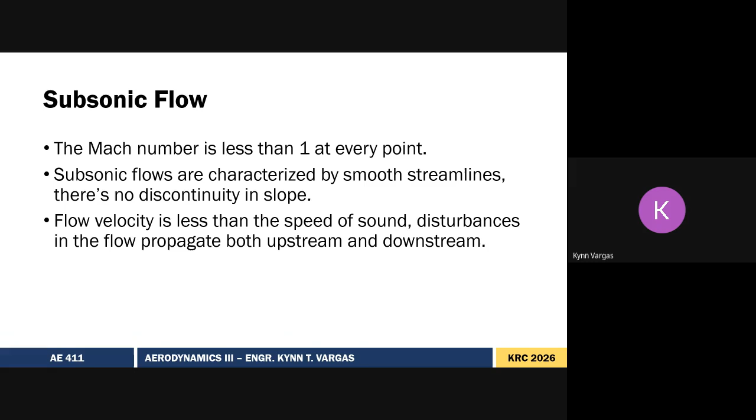We neglect that loss. Now, if the flow velocity increases above the free-stream value, and if M is close enough to 1, the local Mach number may become supersonic in certain regions of the flow. That's why Mach must be less than 0.8 for subsonic flow over slender bodies, and for blunt bodies it must be even lower to ensure totally subsonic flow. So remember these two statements: what we want to happen in subsonic flow is that all points remain subsonic. But if you have a free-stream value close to 1, what can happen on your airfoil...

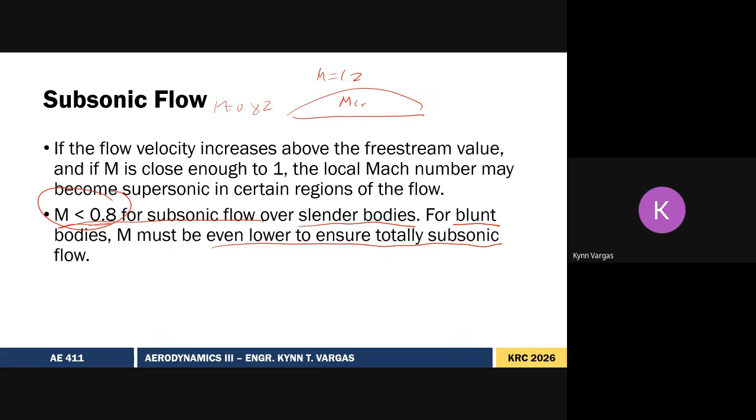For example, if the free-stream Mach is approximately 0.82, at some point on the airfoil there's a possibility of having M equal 1.2. Why? This is our concept of pressure and velocity, which we've explained repeatedly before, during prelims. This is the critical Mach number concept. So we avoid this—we must ensure that the body is totally subsonic by making sure that M is less than 0.8, or even lower than 0.8 for blunt bodies. So the free stream for a totally subsonic flow must be less than 0.8.

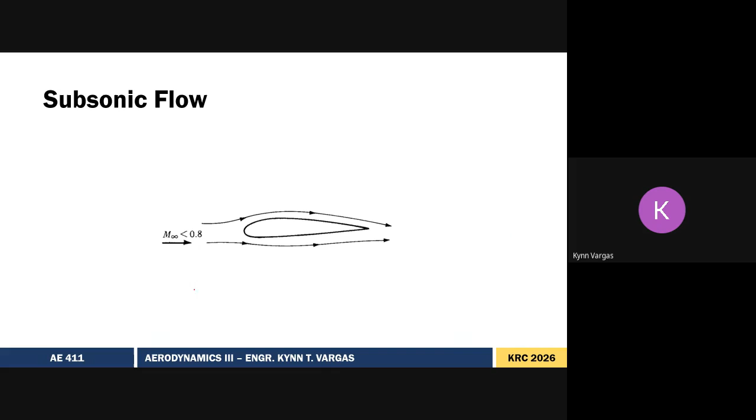Now, what are we referring to when pockets of supersonic region form? It is the transonic flow. It has pockets of supersonic flow over both surfaces of the airfoil. This is terminated by a weak shock wave behind, which becomes subsonic again. So there's a pocket of supersonic flow. Here's how it happens.

This symbol, and this is the surface—this represents a normal shock wave. Here you have a pocket of supersonic flow, and when it gets to the back here, it becomes subsonic again.

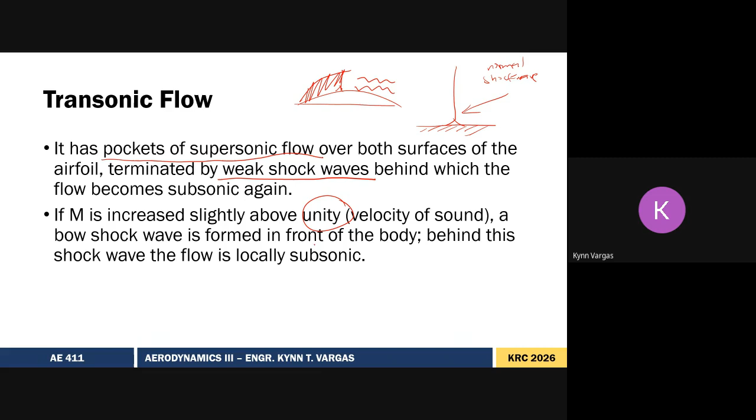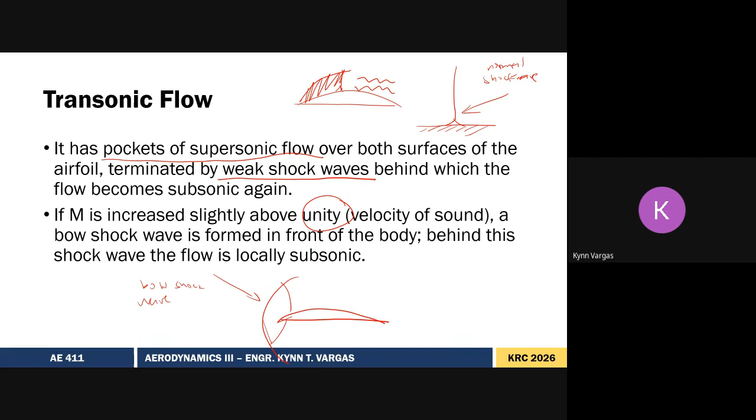Now, behind it, the flow is locally subsonic—this area is subsonic. This subsonic flow then expands to a low supersonic value over the airfoil, so while this part is subsonic, this other part is slightly greater than 1. When that happens, weak shock waves are usually generated at the trailing edge.

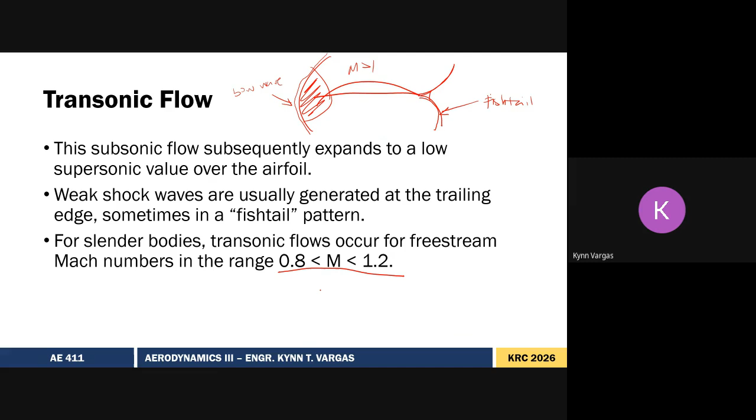So for the flow to be transonic, this is the range we give: it must be greater than 0.8 but less than 1.2. Now here's the visualization. As mentioned before, this is the normal shock wave—this kind of drawing is the normal shock wave. This is the pocket of supersonic region, only slightly supersonic, and when it reaches the back, it becomes subsonic again.

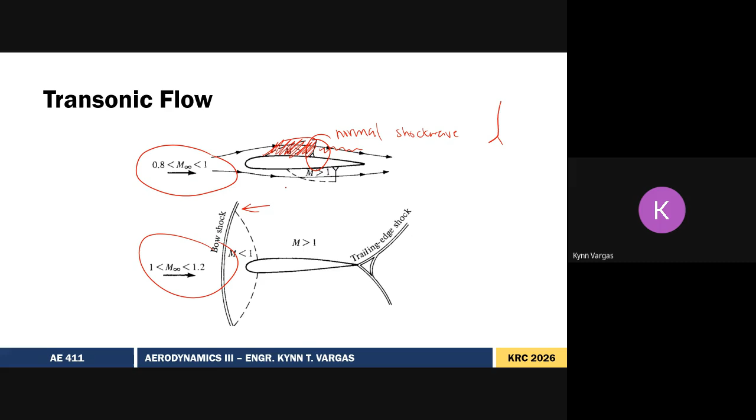This is for Mach less than 1 but greater than 0.8. Now increasing the value up to less than 1.2, a bow shock forms, represented by two lines. Upon reaching this point, it increases again slightly supersonic. The area behind it is subsonic. At the end, you have a trailing edge shock, which is our fishtail.

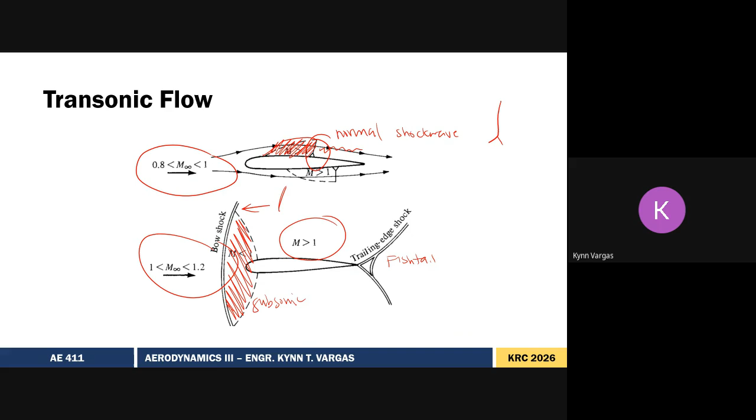So we'll start at slightly higher than Mach 0.8. You get a normal shockwave, and you have supersonic flow. What happens as you increase is the CP goes rearward as velocity or Mach increases. That's true, the CP moves to the back.

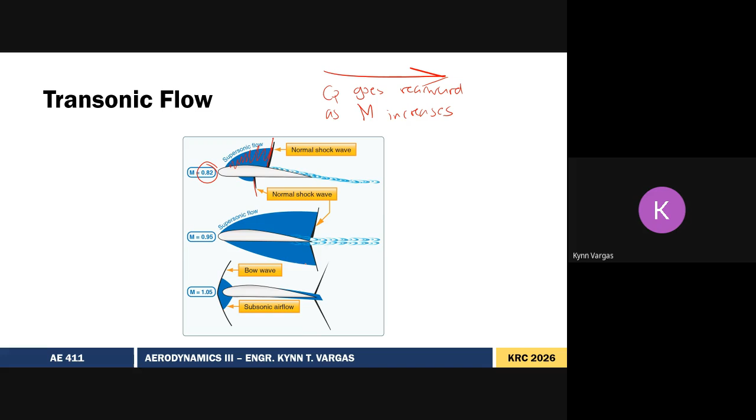Now it goes to the back, but if you exceed Mach 1, which is unity since all sound unites, what happens is you get pockets of subsonic flow here. You'll get a fishtail, and the one in front is your bow wave. So that's what happens.

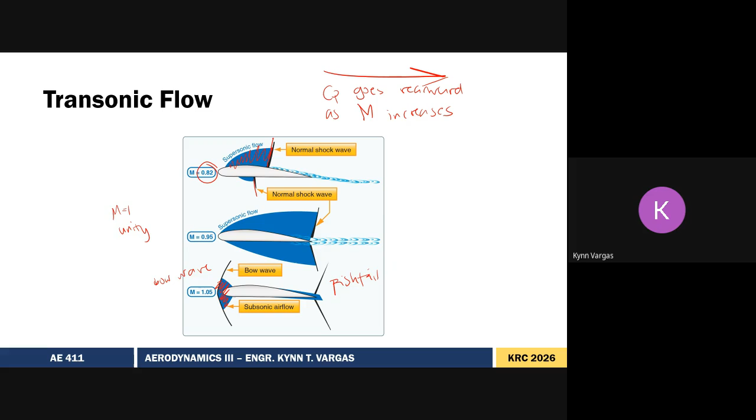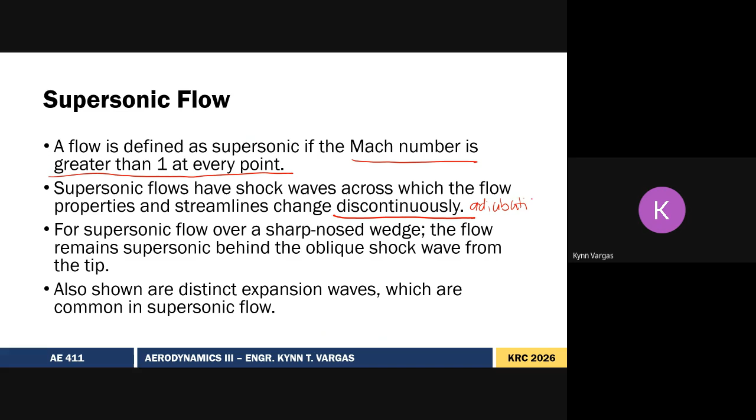Followed by that is the supersonic flow. Upon reaching supersonic flow, Mach number is greater than 1 at every point. No pockets, no transition - everything in supersonic flow must be supersonic. So supersonic flows have shock waves across which flow properties and streamlines change discontinuously. What do we mean by that? Simply adiabatic.

Not isentropic, because discontinuously means not reversible. Once chemical reactions occur, there's nothing you can do - you cannot go back to how it was before. So now, what do we use for supersonic flow?

You already know this by now - a sharp wedge is what we use, particularly a diamond airfoil. It looks like this. Now what happens? When a sharp-nosed wedge is used, the flow remains supersonic behind the shock. So the shock wave is represented by two lines. Now also shown are distinct expansion waves here.

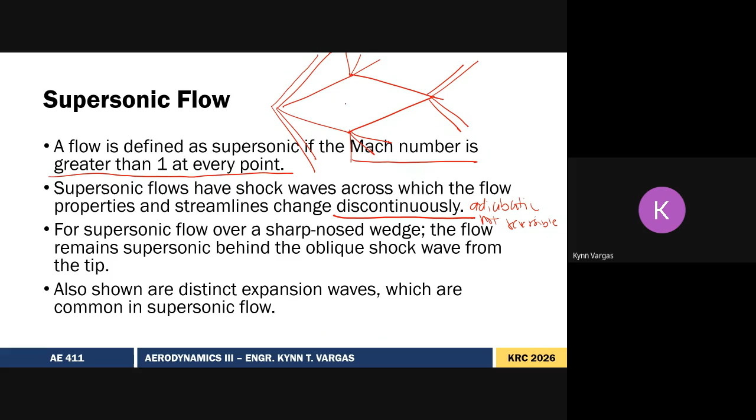Which are common in supersonic flow. So now let's go back to this later. This is the wedge angle, so let's write it here. If a wedge angle is made large enough, let's enlarge it - let's make it like this, call it theta.

So from here, an oblique shock wave - excuse me, what happens is it will detach from the tip of the wedge and form a strong curved bow shock wave ahead of the wedge with a substantial region of subsonic flow. So like earlier, you have a bow wave here, and behind that is subsonic.

So totally supersonic flow is destroyed if the wedge angle is too large for a given Mach number. The value of theta, or the wedge angle at which it occurs, increases as Mach increases above sonic speeds. Therefore, what we need - if it gets thicker it creates a strong shock wave, what we want to happen is infinitesimally small. We want it thinner.

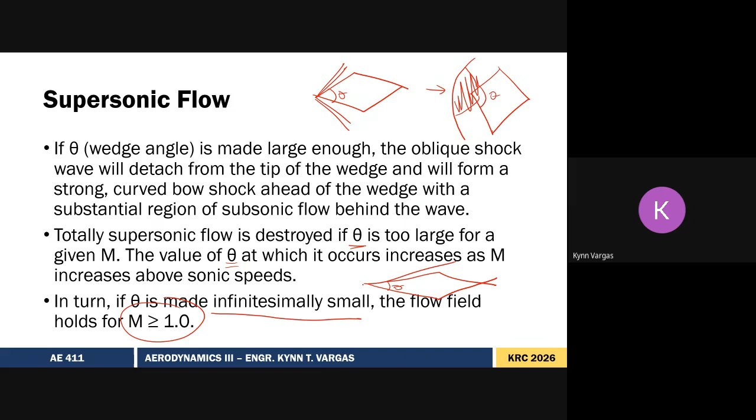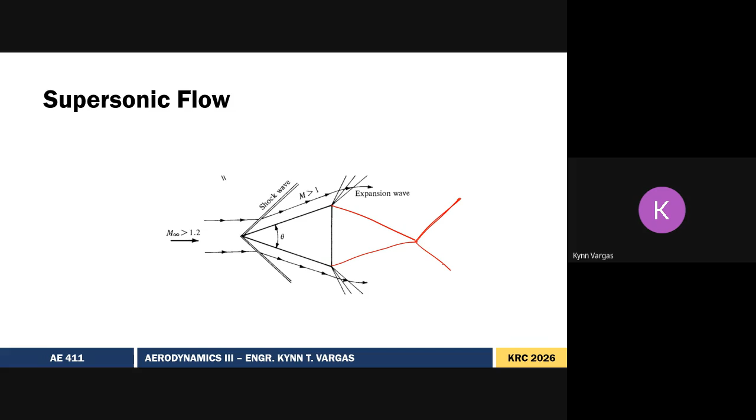So you start at greater than Mach 1.2, because at 1.2 or less, transonic is what happens. So when it crosses the shockwave, it's still greater than Mach 1. And with the expansion fan, there are also other changes in your flow velocity.

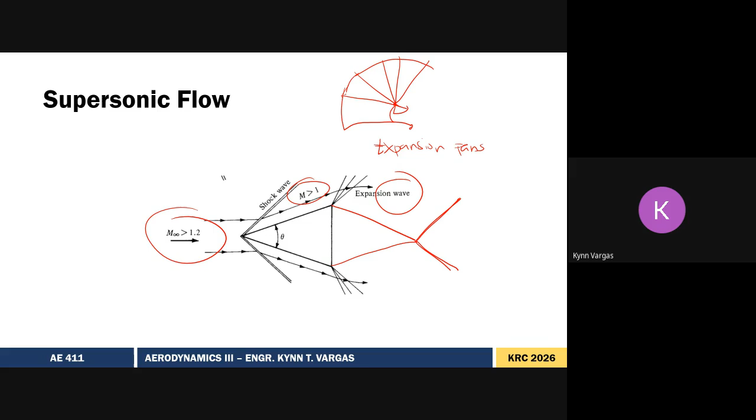So next, hypersonic flow, which is very high supersonic speeds. As Mach increases above 1, the shock wave moves closer to the body surface. So they say, as it gets faster, it sticks closer to the body.

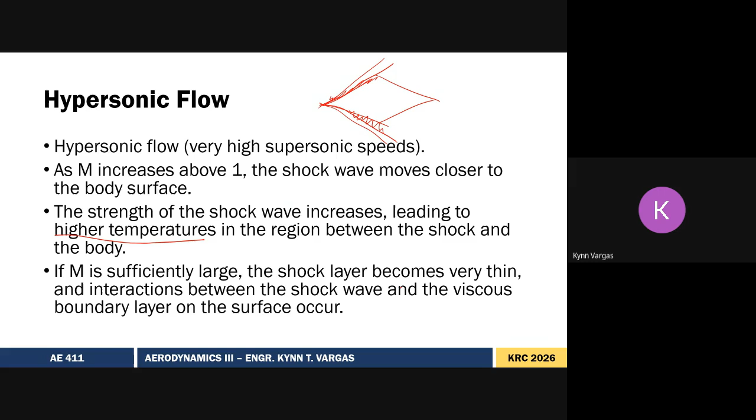It becomes like this. Now the strength of the shock wave increases, leading to higher temperatures in the region between the shock and the body - it heats up. If Mach is sufficiently large, meaning extremely fast, the shock layers become very thin and interactions might occur. What kind of interaction? Chemical reactions.

Anong meron kapag may chemical reactions? Most of the time, nagkukurode or nasusunog yung mga certain components na masyado nang mabilis because of friction and chemical reaction. So napaka-evident niyan. That's why important ang materials configuration pagdating sa aircraft design.

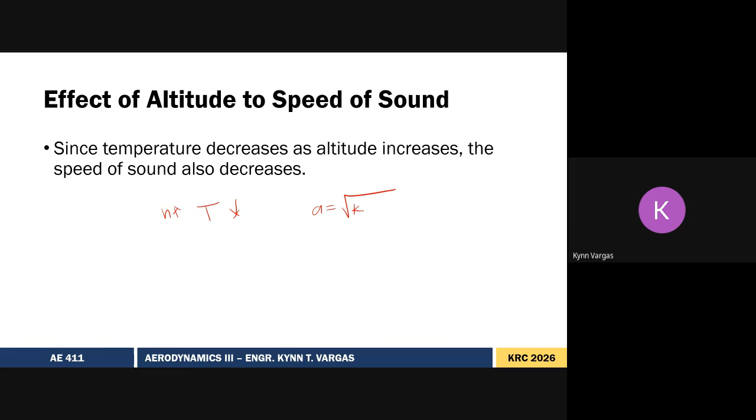So mga good to know, good to consider, summarized na. Effect of altitude to speed of sound. So we know that as altitude increases, temperature decreases, and since A is equal to the square root ng KRT,

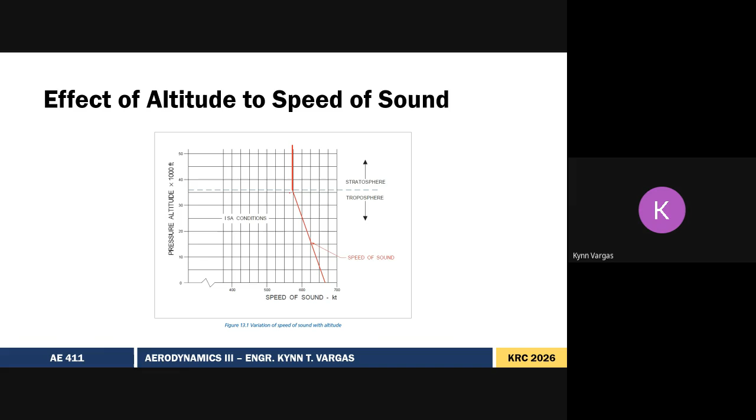therefore speed of sound also decreases. Next, ito lang yung visualize niya kung ano nangyayari. Lapse rate, syempre palababa siya until maging constant sa stratosphere. Yan ang speed of sound.

So critical Mach number, alam na din. This is the critical Mach number, the free stream Mach number at which local velocity first reaches Mach 1. So kahit na umabot ka lang ng 0.8, there's a possibility na mag Mach 1 na yung airfoil mo.

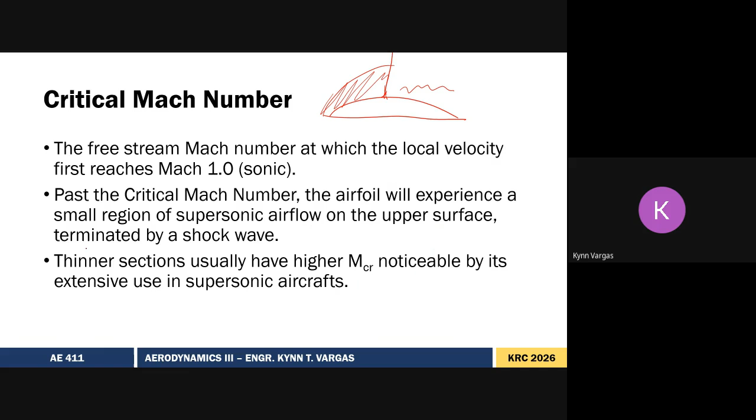Past the critical Mach number, airfoil will experience a small region of supersonic flow on the upper surface terminated by a weak shock wave. So may shock wave dyan, normal. So mabagal to. So dapat, thinner sections have higher MCR. Kaya nga, ang supersonic aircraft ay maninipis ang katawan.

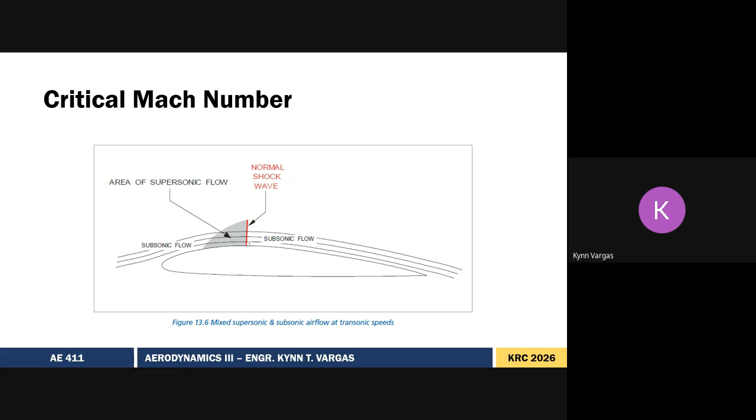Ngayon, ano kaya to? Mamaya makikita nyo kung para saan yan. Bakit yung normal shockwave, which is perpendicular, ay ganyan mag-form? Bakit siya normal yung nag-form? Ba't hindi ibang type ng shockwave? So mamaya babalikan natin to.

So tandaan din to. As angle of attack increases, the critical Mach number decreases. As thickness to chord increases, critical Mach number decreases din.

Ano bakit kaya? Kasi kapag nag-increase ka ng angle of attack, yung velocity na may experience ng upper surface mo ay mataas din. Kapag nag-increase ka ng thickness to chord ratio, mas mahaba yung distance na matatravel sa taas. Therefore, yung velocity na may experience locally ay mataas din.

This sudden surge in velocity sa local airfoil mo or sa local velocity mo, this causes for you to reach Mach 1 faster. So ang nangyayari, even at lower values ng MCR, marireach mo na to. Which is, mag-stall ka kagad. Kuha.

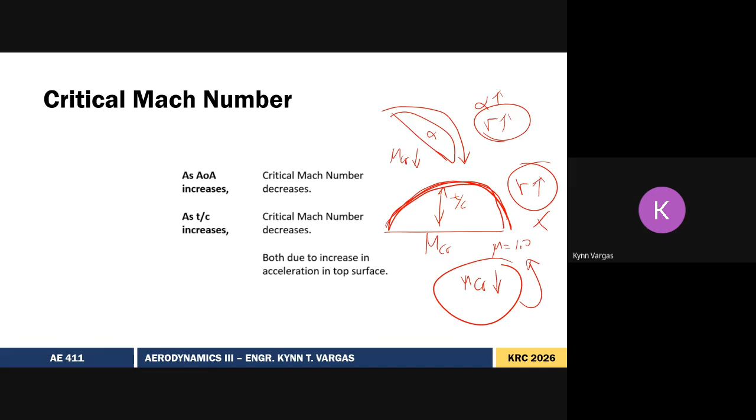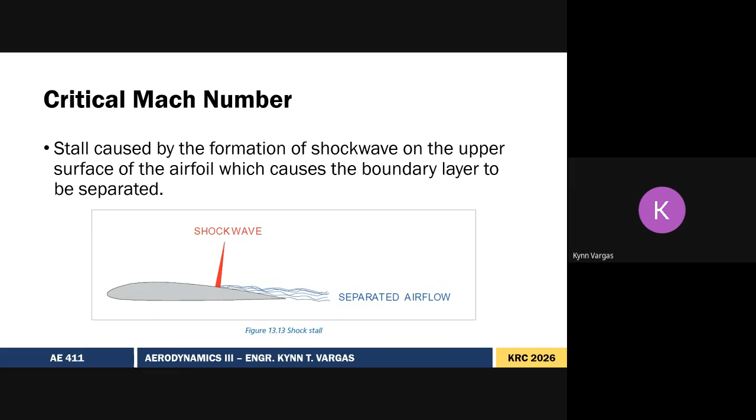So critical Mach number is the stall caused by the formation of the shockwave on the upper surface. Kaya iniiwasan natin mangyari yon. So yung shockwave kasi na yan, it causes subsonic flow which is less energized, hence, separated airflow.

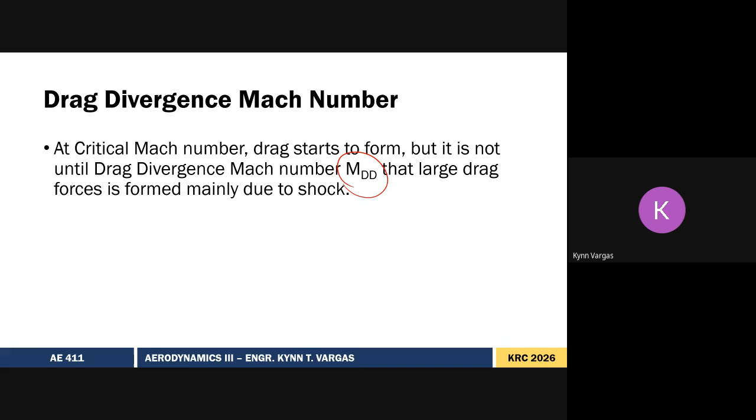Aside from MCR, we also have MDD, which is the drag divergence Mach number. Sa MCR, nag-i-start, pero sa MDD, lumalala. Ang alin? Yung drag. So isa-isahin natin ano yung contribution. The drag directly associated with the trailing edge shock waves, the separation of the boundary layer, and the bow shock wave above Mach 1.0 ang nagko-contribute dyan.

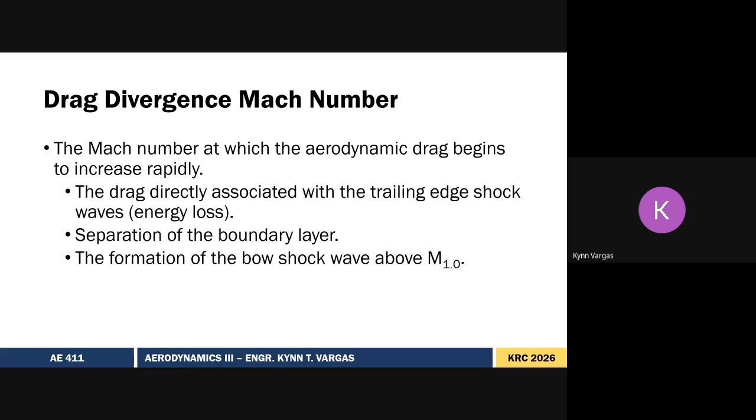Mas manageable ang oblique shock wave. So iwasan natin to. Which mangyayari to sa Mach equals 1.0. Iwasan yan.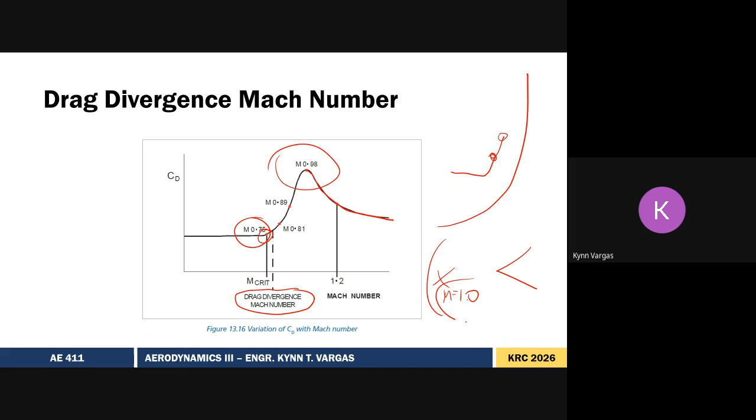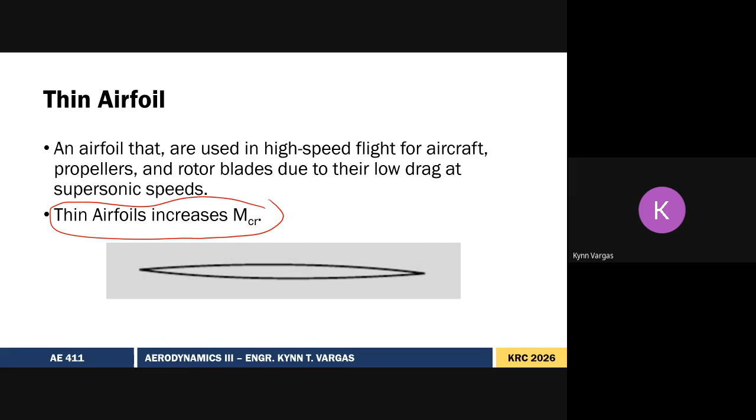So summary, pag thin airfoil gamitin para mag-increase ng MCR. Kapag supercritical airfoils naman gagamitin para sa MDD. Kasi anong purpose nito? To delay the onset of drag and separation.

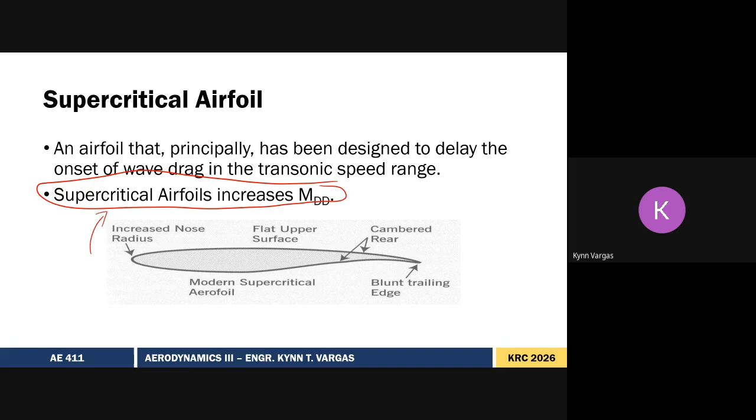Now, alam kong gutom na ang lahat, but this is not buffet, this is buffet. Ano meron sa buffet? It is a vibration of aircraft caused by turbulent airflow over the surface of the airplane. It is repetitive, paulit-ulit, but not cyclic or harmonic.

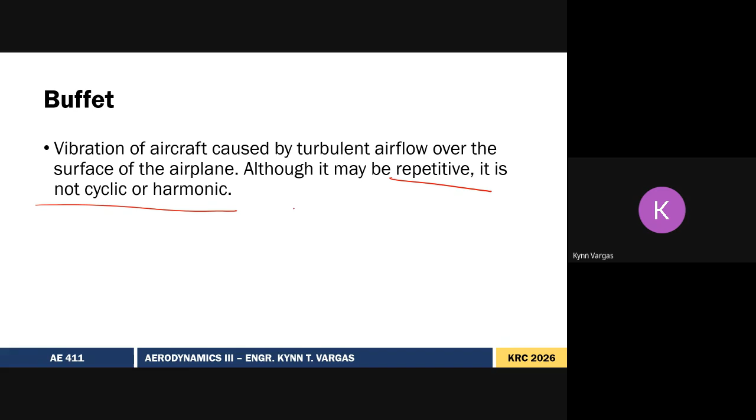Ang ganda pakinggan ng cyclic or harmonic. Pero pag stress ang pinag-uusapan, hindi na. Take for example, electric fan, yan, stand fan, tapos patak ng ulan.

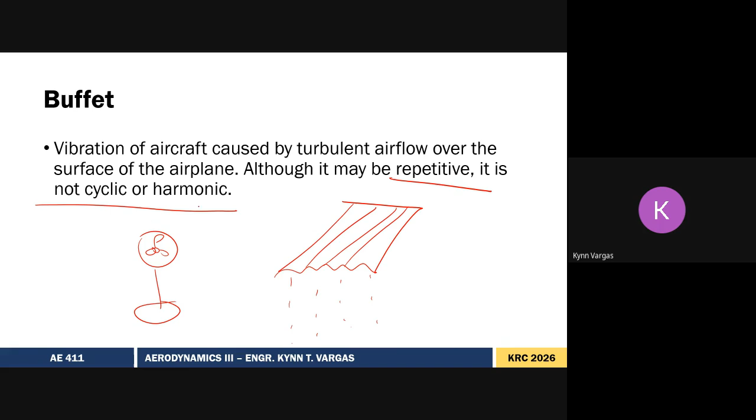Ngayon, yung tunog ng electric fan, lalo na kung clip fan to, ay nakakainis. Kasi yung frequency niya ay predictable. So paulit-ulit yung tunog na kahit mahina, hindi mo siya ma-ignore. Meron siyang buzzing or hum na sounds na nakakainis sa tenga.

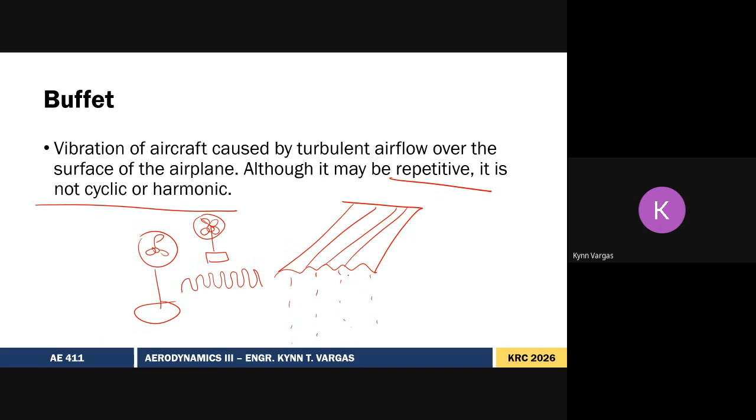Unlike with rain, yan ay paulit-ulit ang patak ng ulan hanggat hindi natatapos. Pero yung tunog niya, hindi siya cyclic or harmonic. It is random. So maganda siya pakinggan, ginagawa pa siyang pampaantok ng iba, including me. So hindi ganoon ka stressful ang buffet sa aircraft.

So ano ba ang buffet? Kapag yung wings mo ay naka-experience ng shockwave, magkakaroon ka ng separated airflow. And this airflow, natatama dun sa surface mo, is what we call as the buffet or the buffeting.

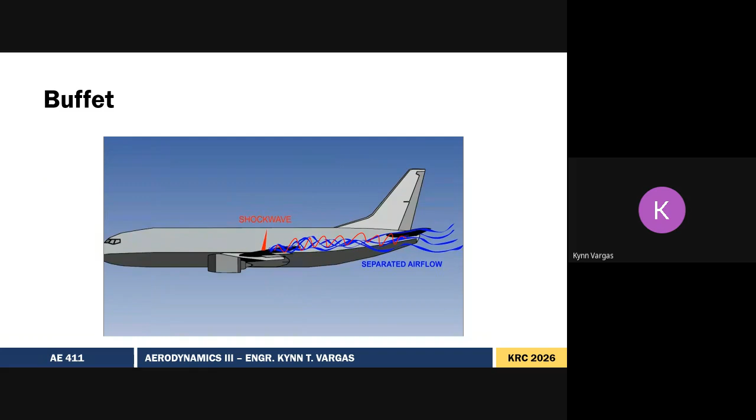So yan yung iniiwasan natin. But hindi siya ganun ka-dangerous. Naiiwasan siya through good design, pero kung hindi man, hindi naman siya ganun ka-dangerous.

Unlike with flutter. Ang flutter is similar with flapping ng wings. So it is self-perpetuating. Ibig sabihin, habang tumatagal, lalong lumalala and is cyclic, paulit-ulit. It is a dangerous phenomena which exposes the structure to uneven stresses. So ganyan yung nangyayari.

Balikan natin ulit yung shockwave. At supersonic speeds, tandaan to, there is no upwash or downwash. Anong ibig sabihin kung walang upwash or downwash? Unlike sa subsonic, na meron kang CDI equal to CL squared over pi EAR, na takes into account yung downwash. Hindi natin yan consideration sa supersonic.

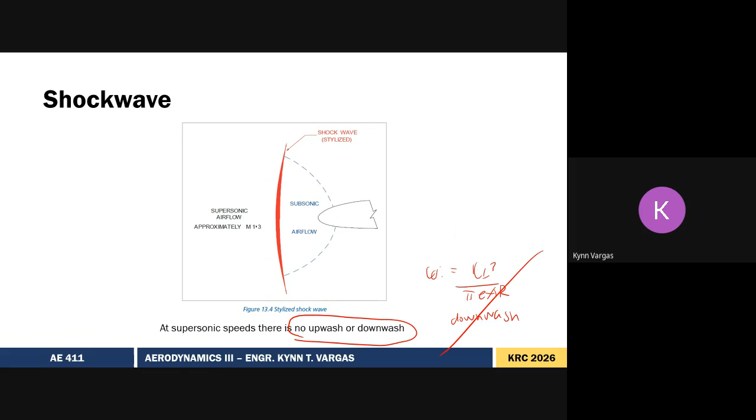But does it make it any easier? No. Hindi tayo magre-rely sa ganitong theory, but magre-rely tayo sa thermodynamics. Ito ang big deal ngayon sa midterms. You need the knowledge about thermodynamics para mapadali yung solving natin.

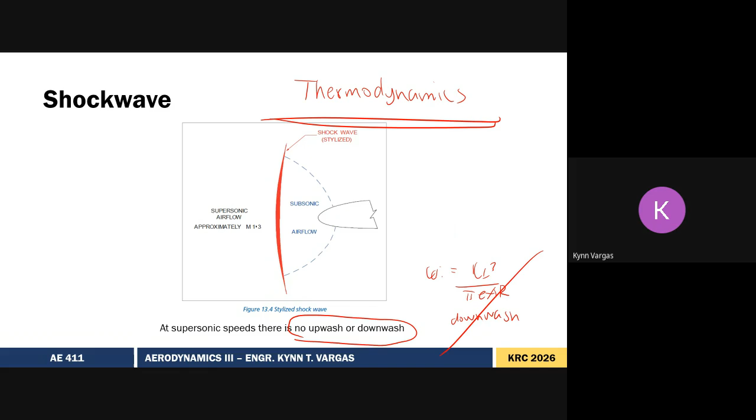Dito na tayo mag-i-start with our normal shockwave, aside from the introduction. So, normal is perpendicular to the upstream. Ganito siya represented. Magkahiwalay, ito yung surface. So this is the normal shockwave.

A shockwave can be generated in an entirely different manner when there is no object in the supersonic flow. How? Kapag meron kang supersonic flow that is slowed down to subsonic, nagkakaroon ka ng normal shock. So bumabalik din siya, meaning some compressibility effects will occur before the aircraft as a whole reaches Mach 1.0, as far as we are knowledgeable with the transonic flow.

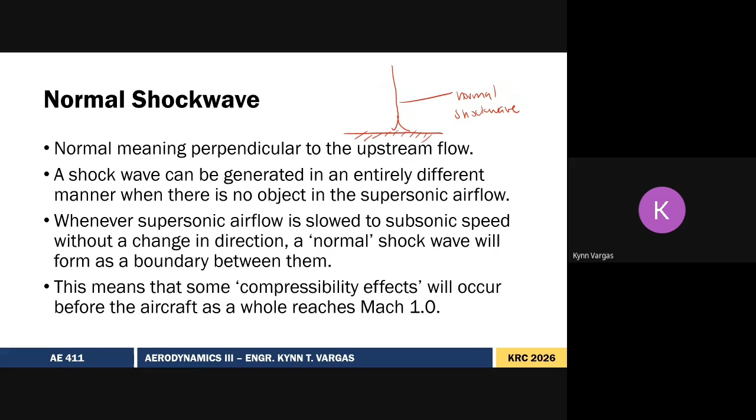Kahit hindi ka pa tumatakbo ng Mach 1, because of the concept ng critical Mach number, magkaka-experience ka na din ng normal shockwave. Ito yung theory: normal shockwaves happen when supersonic flow is abruptly stopped by an obstacle, which is yung airplane, resulting to flow becoming subsonic.

Paano nangyayari dito? Itong theory na to is the Doppler effect. Kapag stationary yung aircraft, sa lahat ng direction, equal lang yung time to reach that. Ngayon, if you were suddenly about to move, sa direction na kung saan ka papunta, there is a compression of the said sound waves.

Kaya nga pansin mo kapag ina-approach ka ng truck or ng kotse, pag nasa gilid ka ng daan, mapapansin mo na habang papalapit sa'yo, mas mabilis yung tunog. Pero kapag papalayo, parang pahina din siya ng pahina, or palayo ng palayo yung appearance ng tunog niya. It's because of the Doppler effect.

Ang nangyayari dito, as you progress to the speed of sound, yung bilis mo ay kasing bilis na nung sound na pinropropagate mo. Therefore, nasa isang lugar sila. This is the unity, nasa isang lugar, creating something which is pressure.

So sa supersonic flow naman, lumampas na. Kaya nga tinatawag na breaking the sound barrier. Ito yung sound barrier, oh. Lumampas ka na.

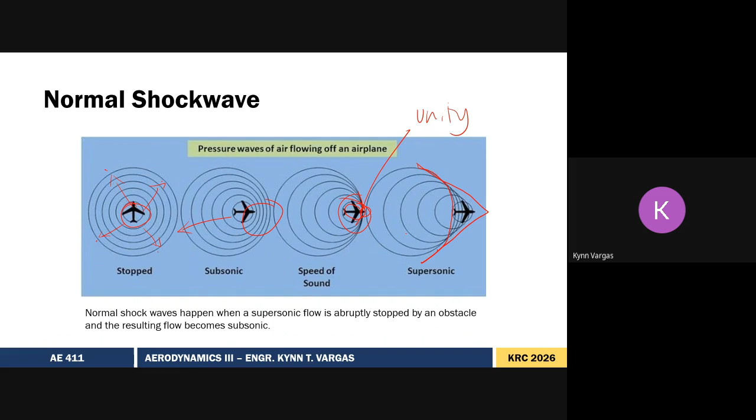So ano yung meron dyan? Balikan natin yung kanina. Ang nangyayari doon, kaya meron kang normal shockwave dito. Yan yung unity. Nag-compress kasi yung sounds, yung pressure waves. Therefore, this is the unity.

Ano nangyayari? Parang ganito yan. Merong nagwewelga. May mga pulis na kabarikada. Tapos, nagra-rush yung mga nagwewelga. Nabunggo. Anong nangyari? Yung velocity nila or yung Mach, bumaba. Kapag nagkabungguan na, nagkagirian na, may pressure na, nagtutulakan na eh.

Tapos, dumadami na yung tao or yung density. Tapos, medyo nagkakainitan na, mataas na yung temperature. So as we approach the Mach number, the shockwave — kapag binunggu mo, Mach decreases, pressure increase, density increase, temperature increases as well.

So why is the behavior of the flow properties in a supersonic flow different than what is happening with the flow properties of a standard atmosphere, particularly the subsonic flows? Bakit nga ba? It's because shockwave is a high pressure region, and because of that, gagamitin natin ay adiabatic. Hindi tayo isentropic process, pero hindi nyo dapat kalimutan si isentropic kasi magagamit pa rin natin siya sa ibang portions ng solving.

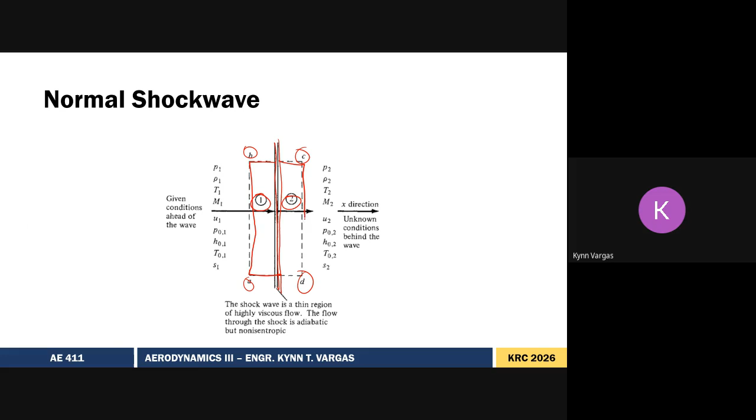Ang control volume is para siyang local mesh kapag nagsisimulate. Yun lang yung focus muna natin, hindi yung interaction niya with surroundings. Ano mangyayari? The side AB is the edge view of the left face, which is perpendicular to flow. At yung kabila naman, CD is area AB naman, but sa kabilang side na. Pangalan natin region 1 at region 2. Itong portion lang na to, region 1, before the wave, and dito, kapag nakalampas na sa wave.

Now, in the process of deriving this formula, tandaan nyo it is steady, adiabatic, and no viscous effects. So ano mangyayari dyan? Ito na siya.

Tanong lang, before tayo mag-proceed. Paulit-ulit kong sinasabi, this is adiabatic. Pero kung adiabatic siya, bakit yung temperature is nag-increase? Di ba Mach decrease, pressure increase, density increase, temperature increase. Kung adiabatic, which is not reversible, asan to?

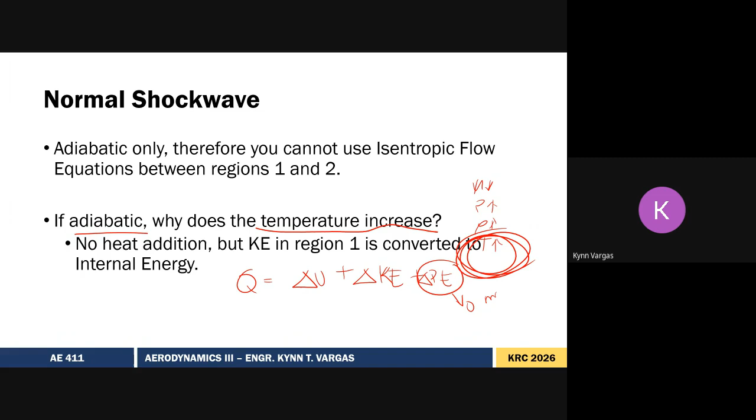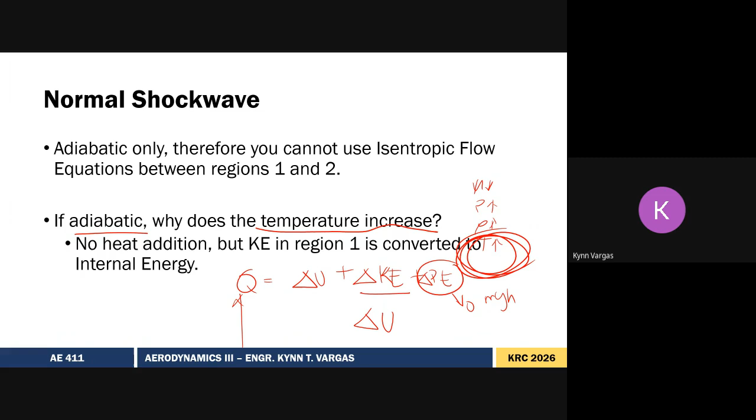Wala siyang heat addition. But if you remember sa formula ng thermodynamics nyo, that formula for Q, which is heat, is equal to the change in internal energy plus change in kinetic energy plus change in potential energy. In most cases, this is equal to 0 kasi hindi natin kailangan yung MGH, yung gravity, for aerodynamics. That's why, ang nangyayari, yung kinetic energy mo is nagiging internal energy, which raises the value of the U. So yan yun. Kaya, i-compute pa din natin yung changes sa temperature.

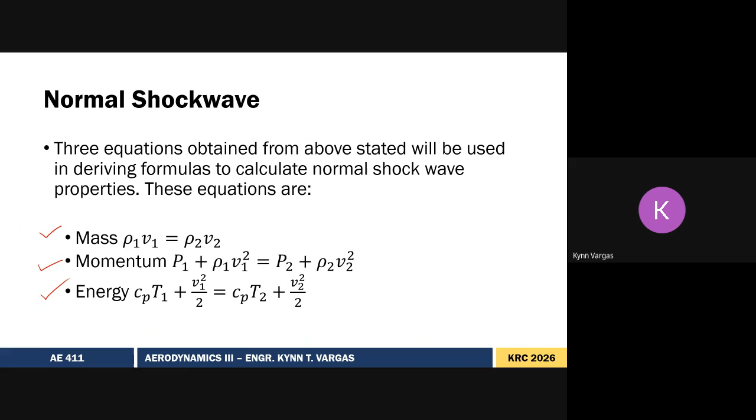So dahil adiabatic yan din, hindi tayo gagamit ng isentropic relations. And ito yung mga i-derive nating formula. We need the mass equation, the momentum equation, and the energy equation. All practicality wise, inabot ako dito noon ng 4 pages for derivation, hindi ko naman na need ipakita. Hindi naman siya ganun ka-relevant. Na-derive naman na sa inyo yon nung Subso and Eroday 1. So ang ipapakita ko mamaya dito is yung derivation ng formulas for ating supersonic.

Yun na lang, para din na humaba. For this one, for this case, you have no bargain. Kailangan talaga siyang memoryahin as is. Pero huwag niyong memoryahin to ng isang buo. Let's divide it into segments. We have the upper equation, and we have here the lower side of equation. Take note that we write this as k minus 1 palagi.

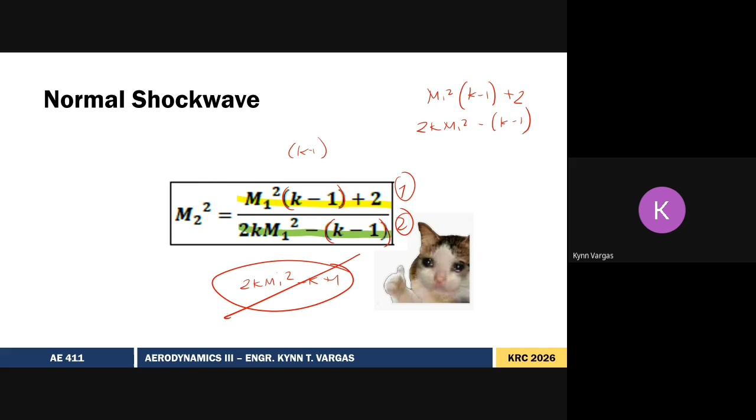So imbes na we write this as 2k m1 squared minus k plus 1, for simplification, we use the binomial k minus 1 instead. So tandaan to, si formula 1 and si formula 2, where formula 1 is equal to m1 squared, the binomial k minus 1, plus 2. And for number 2, it is 2k m1 squared minus the binomial k minus 1. So later, babalikan natin yan.

But before that, examine muna natin. So ano ulit ang formula? M2 squared is equal to m1 squared times the binomial k minus 1 plus 2, over 2k m1 squared minus the binomial k minus 1. Examine muna natin. It states the Mach number behind the wave, which is m2 - yun ang behind, yun nasa likod. Kung mapapansin nyo, this is only a function of Mach number m1.

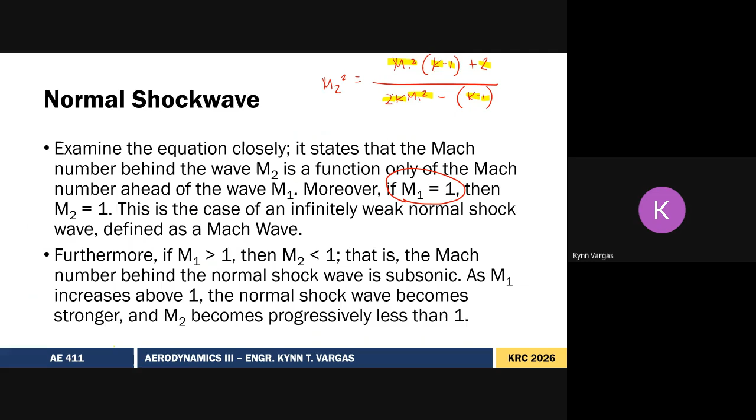Bakit kaya? Check natin, so meron tayong highlighter. Yan, so K is 1.4. 1, 2, 1.4, 1, 1.4, 2. Ang M na lang ang naiiwan. So they have some sort of proportionality. So if M1 is equal to 1, try nyo i-substitute. Ang magiging sagot, M2 is equal to 1.

In this case, infinitesimally weak normal shock wave to, defined as the Mach wave. So masyado siyang mahina pa. Kung tatakbo ka ng M1, wala lang mangyayari, mananatili lang siyang M1. So ano dapat? Pansin natin, if yung M1 ay mag-i-increase beyond 1, yung M2, which is directly nasa likod, is magiging less than 1, which is subsonic.

Ha? Bakit kaya? What does this support? Ang sabi kanina, if yung shock wave natin ay greater than 1, but not less than, hindi pa siya umabot ng 1.2, yung nasa likod niya, which is M2, is subsonic. So this formula is proven correct conceptually. That's why, as M1 increases above Mach 1, the normal shockwave becomes stronger and the M2 becomes progressively less than 1. So tandaan yung formula.

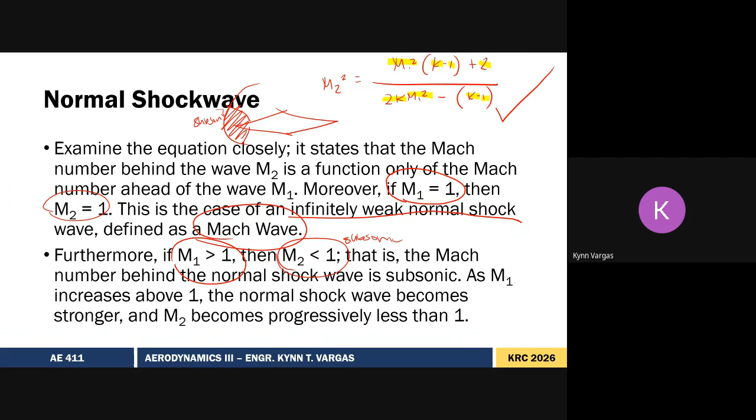Rankine-Hugoniot relations. Ano meron to? Ito yung tinatawag nating jump conditions. Bakit jump conditions? We know for a fact that the total temperature at point 1 is equal to the total temperature at point 2 sa normal shock wave. Bakit? Kasi the kinetic energy is converted lang into internal energy. So it's the same, walang nawala. Kinonvert mo lang.

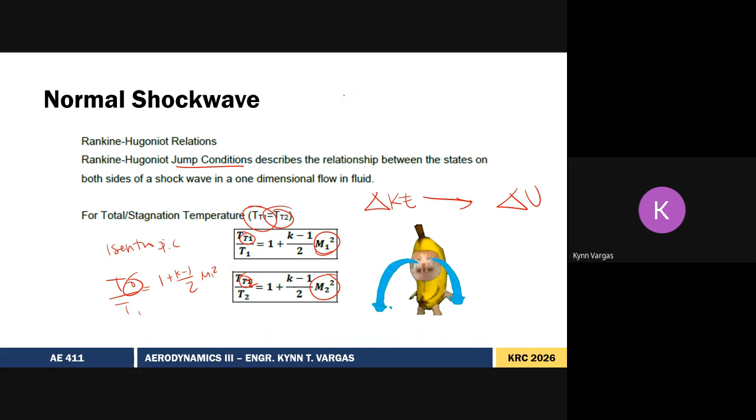So ngayon, TT1 is equal lang din sa TT2. So either M1 or M2 ilagay mo, the ratio will be equal with each other. Kuha yan. Is this a new formula? No, this is isentropic. It's similar with T0 over T1 is equal to 1 plus K minus 1 over 2 M1 squared. The only difference is itong subscript. Ang preference ko pagdating sa supersonic is isulat lahat into T1 ng total. Kasi meron kang total at point 1, meron kang total at point 2, there's a possibility at total at point 3. Nagkakaiba kasi sila. In this case lang, equal kasi sila.

So walang mangyayari, equal lang naman. So ayun, preference-wise, I would like to use T1 instead pag total conditions na. And familiar ba? Kaya yung inyong tawag dito - the Rayleigh Pitot tube equation, meron siyang P02 kasi it is total pressure at point 2. So di ba, kung sinulat mo yung PT2, parang mas madali. But again, this is just a matter of preference. Magkakaiba naman sila.

So, dito tayo sa normal shockwave. For Rankine-Hugoniot jump conditions, yung sum of internal energy and kinetic energy is the same before and after the shock. That's why the total temperature is constant. So yung baliktaran to, pag may increase sa internal energy, may decrease sa kinetic energy and vice versa.

But for this case, sorry to say, the total stagnation pressure is not equal with each other. Bakit? Meron ka ng losses. So paano ito yung formula for static, for point 1 and point 2, which is isentropic lang naman. Pero how can we get this one?

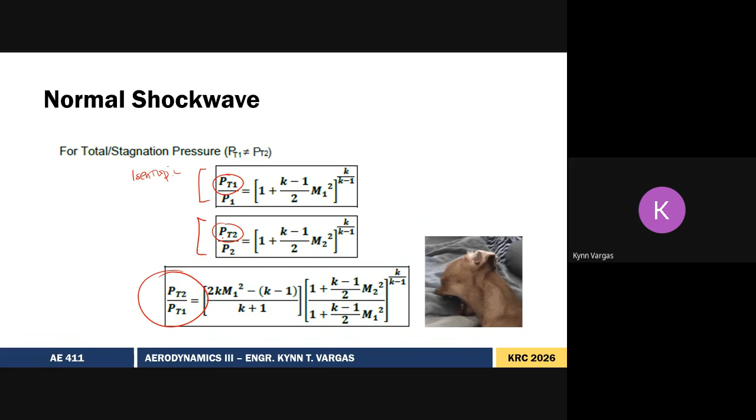So meron kang PT1 dito at PT2. We can use that. So PT1 over P1, gusto natin sa taas si PT2. If we were to multiply this, you can get PT2 over PT1 times P1 over P2. Hindi ito yung kailangan natin kasi ang kailangan natin, ito lang.

So what can we do? Pwede tayo mag-multiply dito ng P2 over P1. Makakancel to. Then we are left with ito. So anong gagawin natin? So ang formula pala ay PT2 over P2 over PT1 over P1 times P2 over P1. Anong formula niyan?

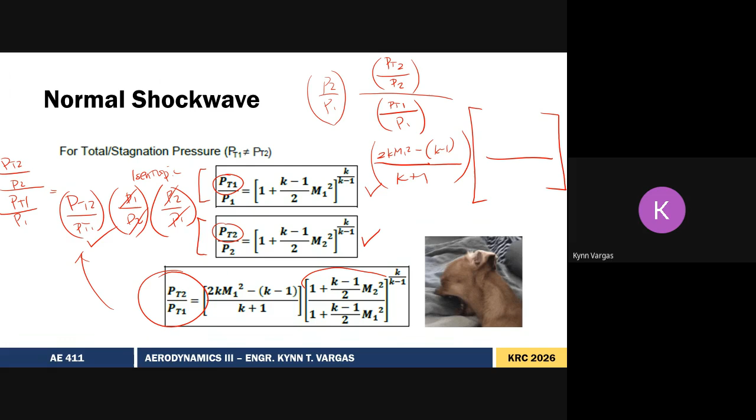Ito, pagpalitin natin, isulat ko lang to sa kabilang side. P2 over P1 is equal to 2K M1 squared minus the binomial K minus 1 over K plus 1, times sa ibabaw, PT2 over P2, ito lang, kokopyahin mo. Tapos ito, which is ayan yun. Diba? Nag-share naman sila ng parehas na exponent. So kahit balikan nyo pa, ito siya.

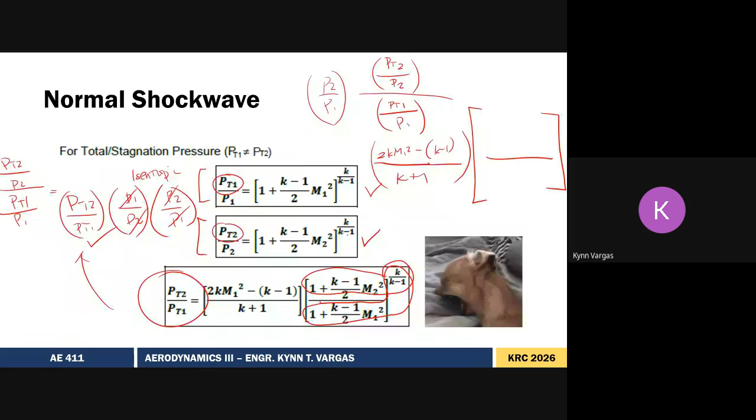So ngayon, bakit kailangan adiabatic at hindi isentropic? Nangyayari pa rin to, may naiipit na velocities dyan, which is adiabatically slowed down to 0.

Dito na tayo sa good part. Paano natin siya mememoryahin? So mag-start tayo with our Mach number. Di ba, ang sabi ko kanina, we need to memorize this as 1 and 2. So mark as green. Ngayon, remember, MVPT. So paano mangyayari dito?

So ang isunod natin sa M is V. Ngayon, dahil ito ay velocity, hihiram siya dito sa Mach. Ito ay Mach, ito ay velocity. They are very much related to each other. Therefore, siya yung pahiramin mo nung nasa taas. Then meron kang bagong equation, which is in color blue, M1 squared times the binomial K plus 1. So ito equation 1 pa din, but this is equation 3 na. So next.

Mach number is used for compressibility. If it is used for compressibility, therefore it is used to identify pressure. Hence, pahiramin natin yun nasa ilalim, i-distribute mo sa taas niya. But this time, meron kang K plus 1. Palitan natin na ang kulay. Anong di pa nagagamit? Orange na lang. Yan. So now that you have that, ano kayang gagawin natin dyan?

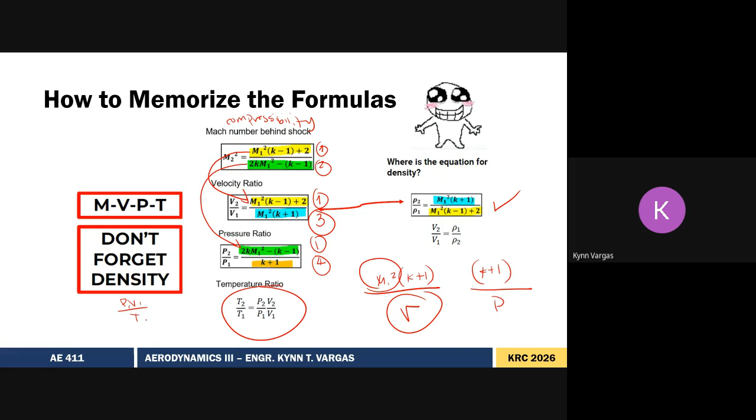Paano natin kunin si density? Baliktarin mo lang si velocity. Meron ka ng density. How about temperature ratio? From your thermodynamics combined gas law, P1V1 over T1 equals P2V2 over T2. Sorry, this is yan V2. Ngayon, i-rearrange natin. Ang kailangan natin ay T2 over T1. So itong T2 over T1, pag nire-arrange mo, T2 over T1 equals P2V2 over P1V1. Hence, ito yung makukuha. Ngayon, yung P2 over P1, isulat natin dito.

2K M1 squared minus the binomial K minus 1 over K plus 1. Next, multiply natin ng V2 over V1. We need M1 squared K minus 1 plus 2 over M1 squared K plus 1. If we look closely, K plus 1 may K plus 1, we can rewrite the denominator as M1 squared K plus 1 squared. Kung babalikan natin dito, ayun siya.

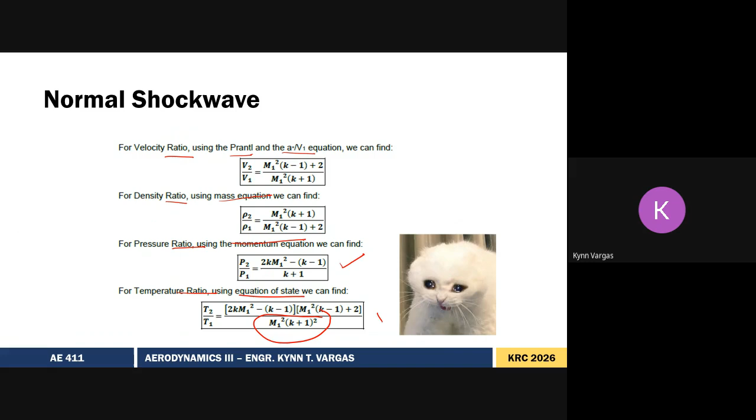See, equation of state lang siya. Nakompleto mo siya. Mahirap ba? Hindi, kailangan mo lang makabisado si M. From M, you need the 1 and 2 equation. Dahil ito ay Mach, ibigay mo sa velocity. Dahil ang Mach ay may relationship sa pressure, ibigay mo sa pressure. Ito ay velocity, that's why meron siyang K plus 1, saka M1 squared. Dahil ito ay pressure, K plus 1 lang. Density, kabaliktaran ng velocity. Temperature ratio, pag-multiply mo lang si pressure and velocity. And that's it. Ganun ba kahirap? Hindi. Huwag nating pahirapan ng sarili. We need to innovate and find ways para maging mas madali sa atin yung pinagagagawa natin.

So let's see if it's recording. Yes, it's recording pa din.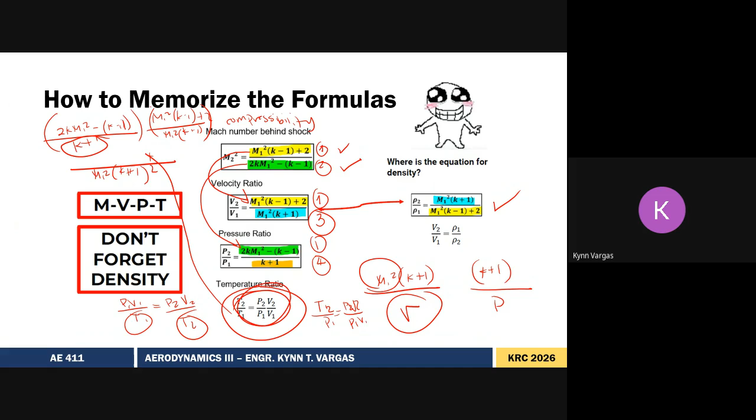Konting knowledge check lang. Ang concept kasi is not limited to multiple choices. Ginagamit siya to help you solve. Para malaman mo, tulad nung kanina dinidiscuss natin, what values do you expect? Should it be greater? Should it be less? So from there, ma-identify mo na agad na, ay mali yung ginawa ko kasi tumawid ako ng part ng sub 2, pero ang nangyari, tumaas, dapat bumaba. So from there, malalaman mo kung tama ginagawa mo.

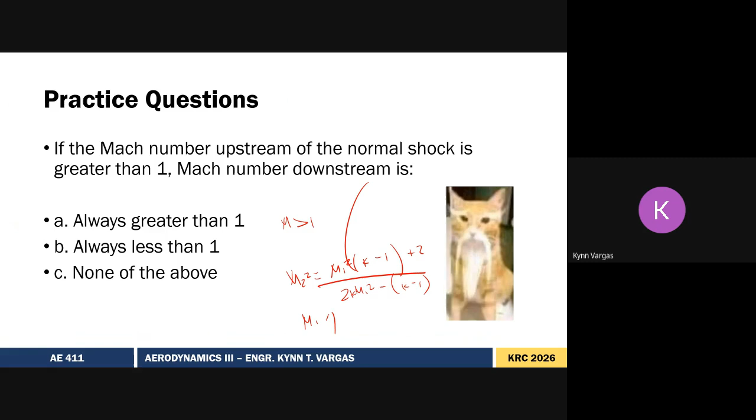If the Mach number upstream of the normal shock is greater than 1, what is the Mach number downstream? It should be less than 1. Why? According to the formula, M2 squared equals M1 squared times (K minus 1 plus 2) over (2K M1 squared minus the binomial K minus 1). If M1 continuously increases, M2 continuously decreases below 1.

Next, across the shock wave, the static temperature blank while the total temperature blank. If we don't know, let's think of another concept: total temperature. We know that total temperature is due to the conversion of kinetic energy to internal energy, so it should be constant. That limits us to choices B and D, so let's remove the others.

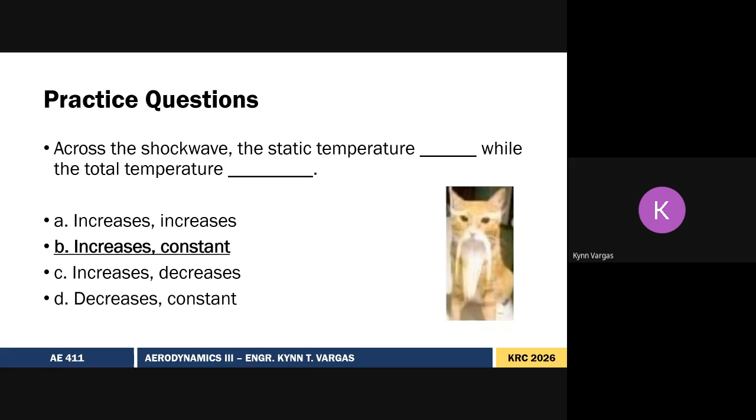Next, the Mach number downstream of a normal shockwave is always subsonic. That's it.

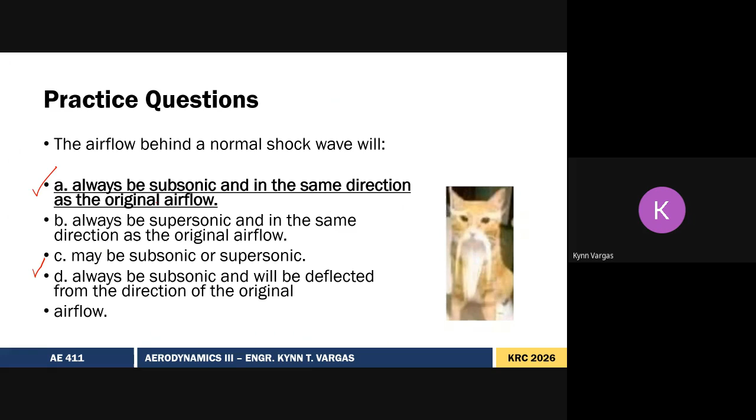Let's just review. Now let's move to practice problems and how we solve this. So now the question gives the velocity and the temperature.

What is the Mach number behind the shock? Mach number behind, that's M2 - it is equal to M1 squared times (K minus 1 plus 2) over (2K M1 squared minus the binomial K minus 1). Just substitute the values.

Where is M1? M1 equals V over the square root of KRT.

Asan si V? Ayun. Asan si K? Ayun. R? Ayun. T? Ayun. So, kompleto na. Akyat ka na.

Kompleto na. Tapos na. Bakit hindi ko ulit dinidiscuss paano i-solve yung mismong exact value? Kasi pagdating sa exam, hindi ako naglalagay ng exact value. Ang importante sa akin ay magets nyo yung process, kasi pag kumpleto nyo na yung process, regardless kung anong value ang input nyo, tama ang magiging sagot given na tama ang process nyo.

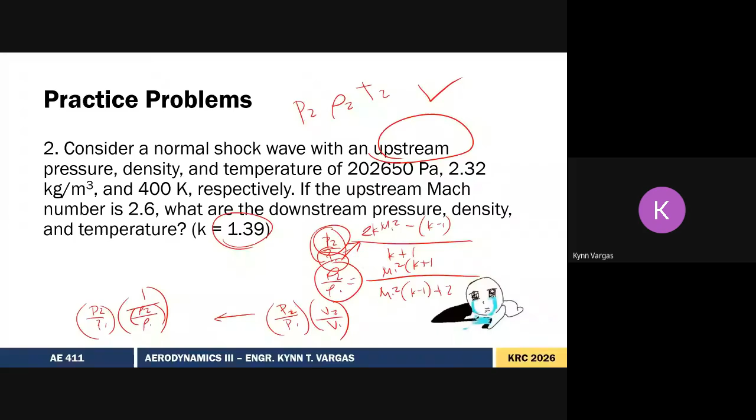Next, consider a normal shock wave where upstream Mach number is 2.3. Ang upstream is sub 1 yan. Tandaan, upstream nasa taas, downstream. Ang waterfalls ay nanggagaling sa taas pababa. So, upstream ay 1, downstream ay 2. So, ang hinahanap dito ay pressure, density, and temperature across the shock. Kung across, lumampas, ibig sabihin, P2,

Rho 2, and T2, sorry. Pero meron tayong hindi binasa, ratio ang sinabi. Okay, kung ratio, P2 over P1, T2 over T1, Rho 2 over Rho 1. Enough na yan. Kailangan mo lang ulit isulat si formula, where ang formula nito ay dependent lang sa K at sa M. Kailangan mo lang masulat yung formula nito, kunin mo tong M, kunin mo tong K, then you are good to go.

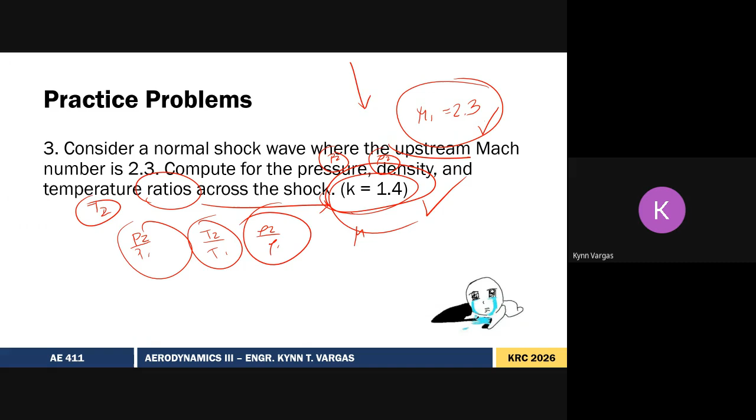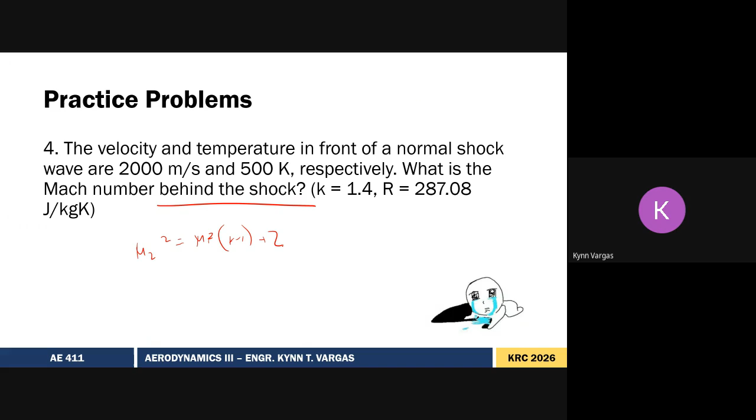Next, the velocity and temperature in front of a normal shock wave are 2000 m/s and 500 Kelvin. So, what is the Mach number behind the shock? Mach number behind the shock is M2. M2 squared is equal to M1 squared, K minus 1 plus 2, over 2K M1 squared minus K minus 1.

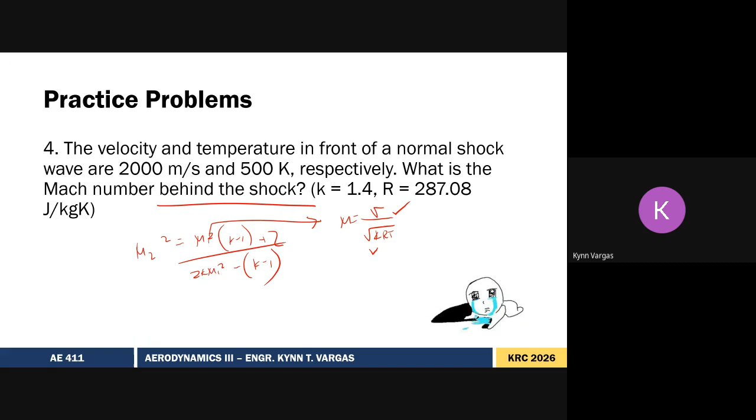Meron kang velocity, o, di si Mach wala, pero si velocity meron. Meron ka ding K, meron kang R, meron kang T. Tapos na. Next, consider a normal shock wave.

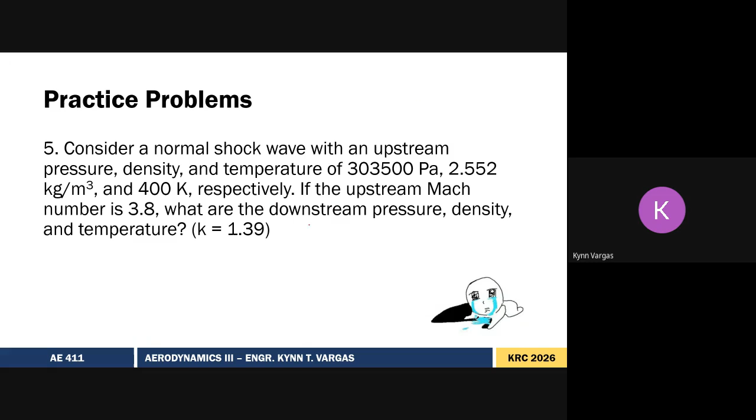Ang hinahanap ay, so ito katulad lang din ng problem 2. Calculate the velocity, temperature, pressure, and density downstream. Downstream is V2, T2, P2, rho 2. Ganun lang kasimple. Di ba? Ang nagpa-komplika lang sa kanya is bagong formula.

Pero pagbago ba mahirap? Hindi necessarily so. Mahirap siya kung hindi mo babasahin or papanoorin tong lecture na to, hindi mo tatry sagutan itong practice problems. Mahirap talaga to, lahat ng hindi familiar ay mahirap. Pero with the given lecture, with the given materials, why not? Bakit magiging mahirap? Kayang-kaya to, kayang gawing madali. And that's it.

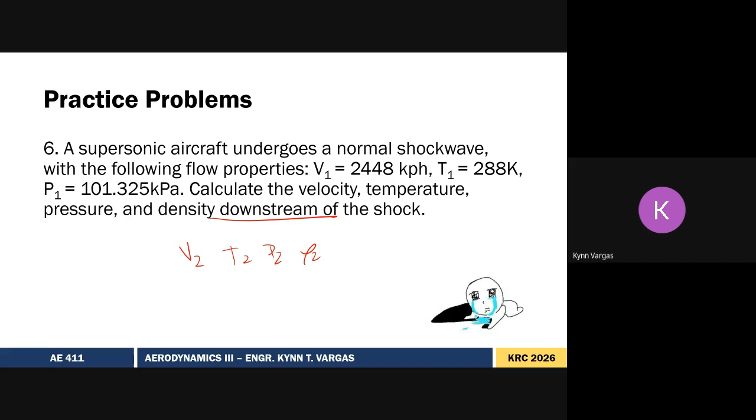Aside from that pala, meron pang problem 7, may dinagdag pala ako, which pinapakalculate lang directly. Meron ka ng velocity. So, kung walang given na temperature, edi standard. Yun lang naman yun.

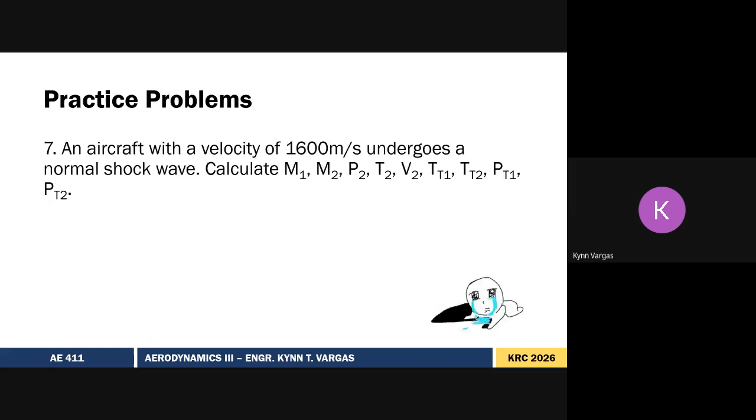So, for references natin, must read material. Okay, i-reiterate ko na, chapter 13, hindi chapter 11. So, chapter 13, basahin nyo to, High Speed Flight by Principles of Flight. Pero kung walang time, wala namang problema. This is just magagamit nyo for board exam.

Tapos eto, for aerodynamics, read chapters 1 to 9, prerequisites to. Chapter 1 to 9, aerody 1 and 2, ginagamit din to sa design 1. So, para sa mga nagtatanong kung paano aaralin, ito yung pinakamabilis. Kung wala kayong background sa aerody 1 and 2, medyo mababa yung background, you can use this. Tapos, pagdating naman sa, well, this is for the second semester, design 2, saka structures 1 and 2, pwede to. Magagamit nyo pala to ngayon kasi structures 1, yung chapters 10 to 16 naman.

That's it. Napalitan lang yung references dito. Ang ginamit ko na dito is iba na. So, Engineering Supersonic Aerodynamics by Bonney, Principles of Flight by CAE Oxford and by Williams. So, yan lang for ating normal shockwave. That's it.